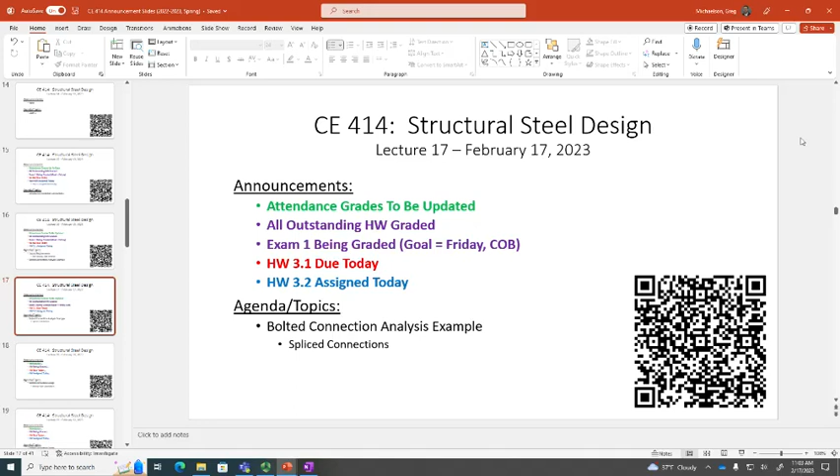Today what we're going to do is continue our discussion of bolted connections. I'm going to try and make it a little more real today, and you'll see what I mean when we start getting into this.

First off, let's just sort of recap the math. I want to make sure everybody understood what we did in class and on the last homework assignment. And my apologies for pulling a sneaky on you about the thread condition, but I didn't tell you what the thread condition was. I made you use your noggin.

If you do not know the thread condition, what do you do? Assume the worst case scenario. And what is the worst case scenario? That the threads are included. You assume the threads are included. The threads being included would be the worst case scenario for bolt shear capacity.

Yes sir, I just wanted to say my favorite thing about this class, or this in general, is there's a lot of fail-safes included. So if you don't know, pick the worst case scenario, and then by the end of it, it might be overbuilt, but that's not a bad thing. It's funny you say that.

There is a philosophy in connection design, which we will talk about later, called designing to develop a full capacity.

So let's fast forward a little and talk about connection design, because here's how it works if you want a nutshell approach. If I tell you to design a connection, the first thing you need to do is determine the factored load, right? So you have your dead load, your live load, 1.2 dead plus 1.6 live, and you get 200 kips.

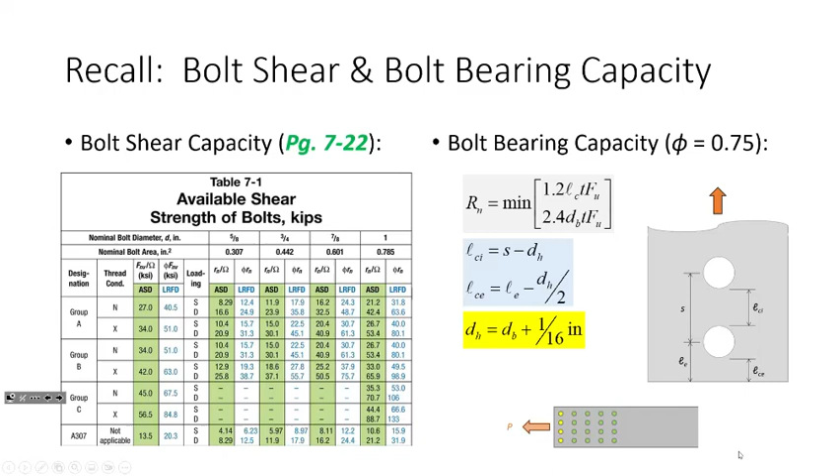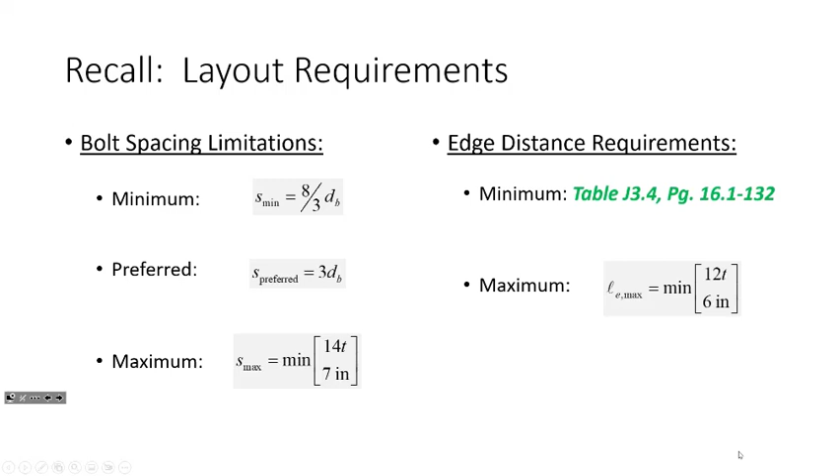Now here's our layout requirements. We have minimums and maximums that we're checking, but if we're designing, maybe we'll use preferred, maybe we'll use minimum. I'll make sure you know on an assignment because I don't want to get 60 different answers that are all right. Everything can be computed except for minimum edge distances, because that just comes from fabricator preference, and that's why it's a lookup.

I like the real world, so I would like to discuss some of the things that we've been talking about and provide some real world context.

Does anybody recognize these pictures that I took? That should be a hint. It's the engineering lab, that building right over here. One of the cool things about this building - my office was in this building when I first became faculty at Marshall a long time ago. I remember walking into the building and saying, ooh, I could see the steel frame, this is awesome. So I took some pictures here because I wanted to work through a real bolted connection, and I picked a connection here in the building, particularly the connections on this beam.

If we look at the structure, we have these round HSS columns that are supporting the gravity load. Between the two is a W shape, a W section beam. These roof joists are framing into the beam, and that beam is connected to the column which goes to the ground.

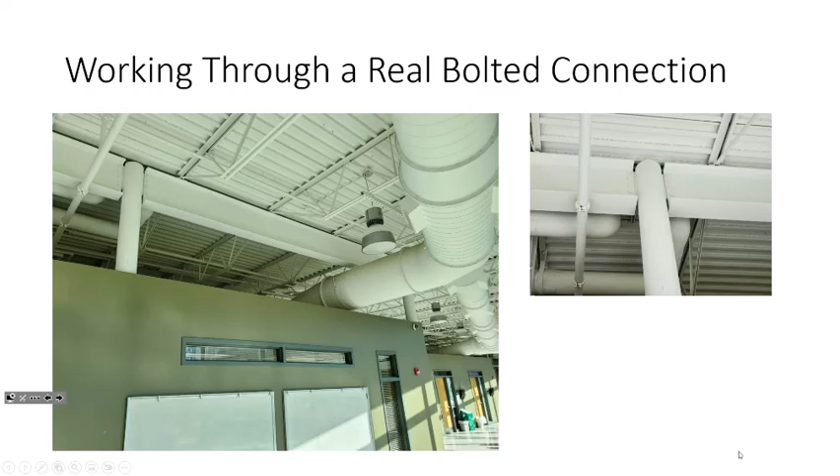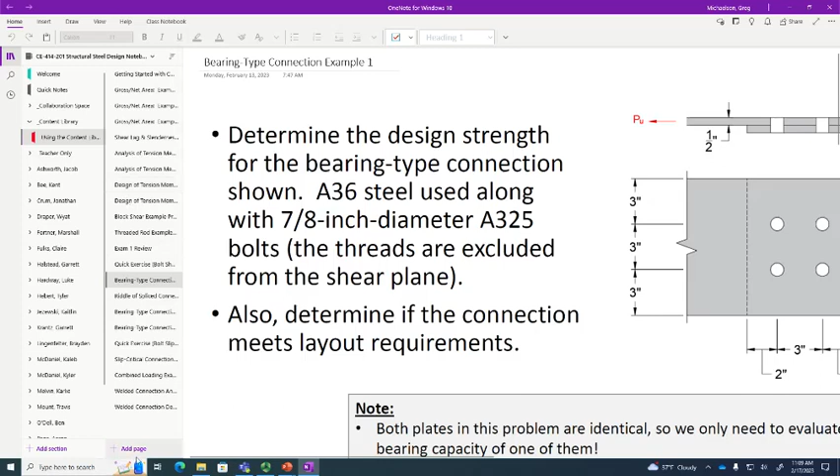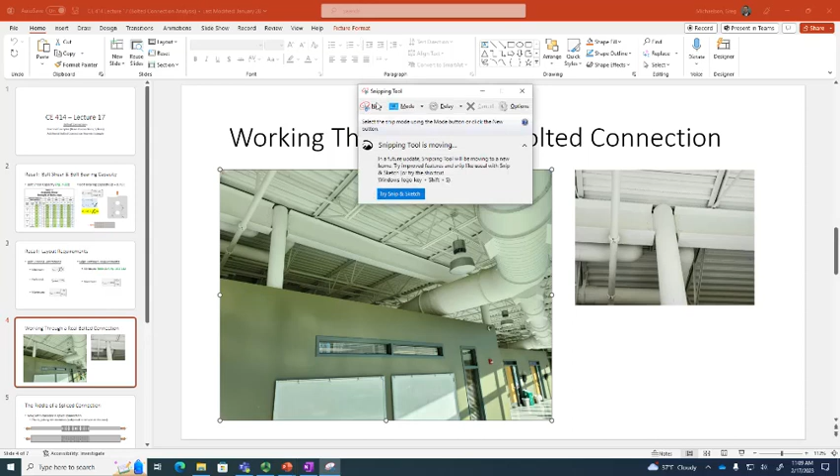So if we go back to what we did last semester in the wonderful world of structural analysis, let's go through this. I'm going to put this right here - real connection discussion. Let's take this picture here, put this here. Let's use the snipping tool. It doesn't like it for some reason. Sometimes the snipping tool, it likes that. For some reason it doesn't like me to snip images, but when I use the snipping tool, it likes it. I don't understand.

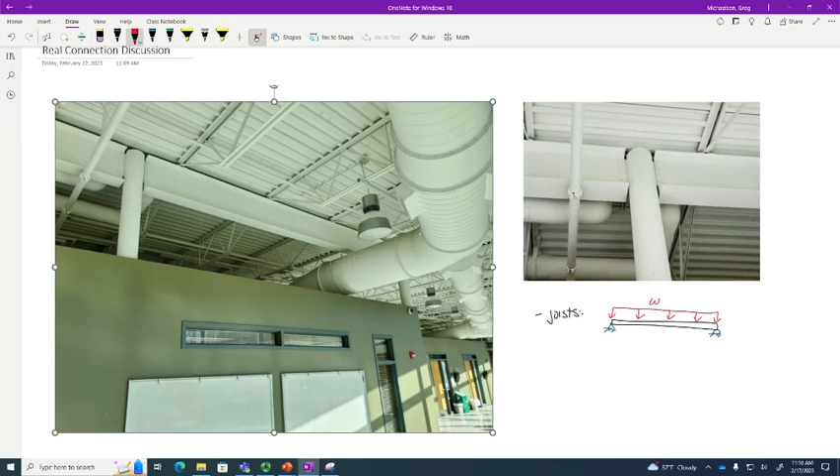So let's go back to the wonderful world of structural analysis. The first thing we would do is treat these roof joists as beams. So the joists would be something like this - we'd have a support condition, and we'd have a distributed load on the roof. By the joists, I'm talking about these open truss looking things - those are called open web joists, basically just roof beams essentially.

So how do I get the load per beam? If I'm looking at this beam, I take half this way and I have the tributary area - y'all remember that from CE 312, wonderful world of structural analysis? What happens is I get reactions, we'll call it RB for the beam reaction. Those are the forces that the beam has to supply to keep the joist upright.

So then if I look at the girder, in this case it's the W shape. So I've got the beam - how many do we have? We've got 1, 2, 3, I think 4 based on the image. So you probably have something like 1, 2 - oh, that's off, that scales off - so 2, 3, 4, right? Okay, now let's see if y'all are paying attention - is that RB? Is this RB?

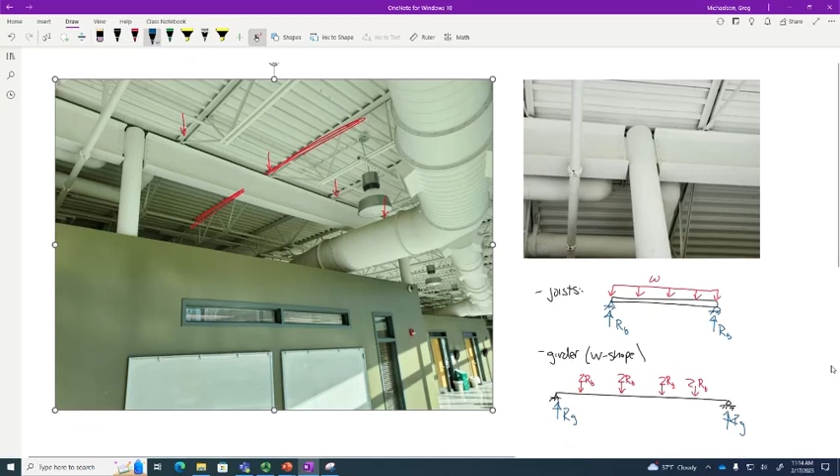Does that make sense? Okay, so now what I want to focus on is the bolted connection. Let's take a look at that. All right, so here's kind of what we've got going on. We'll say bolted connection. All right, let's see.

We've got a round column. So here's our round column. It looks like we've got a little plate sticking out of that. But we've got our I-beam that frames in, and then we've got a plate that sticks out. The plate goes back here, and then we've got something like 1, 2, 3, 4 bolts. Is that right? Does that look kind of right? Everybody with me on that?

Okay, so we're getting, at the end of this connection, this girder reaction. And let's just say, for the sake of discussion, it's 30 kips. It doesn't really matter what it is, but let's just say it's 30 kips. So now we need to start evaluating this. So let's look at this from a bolt shear perspective.

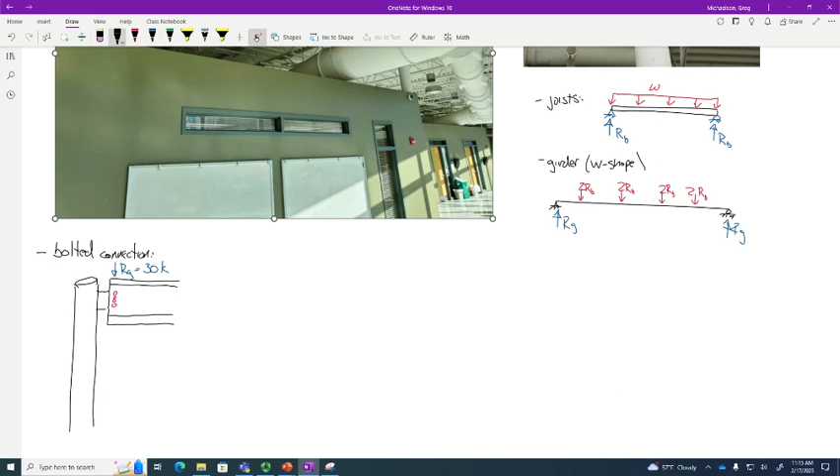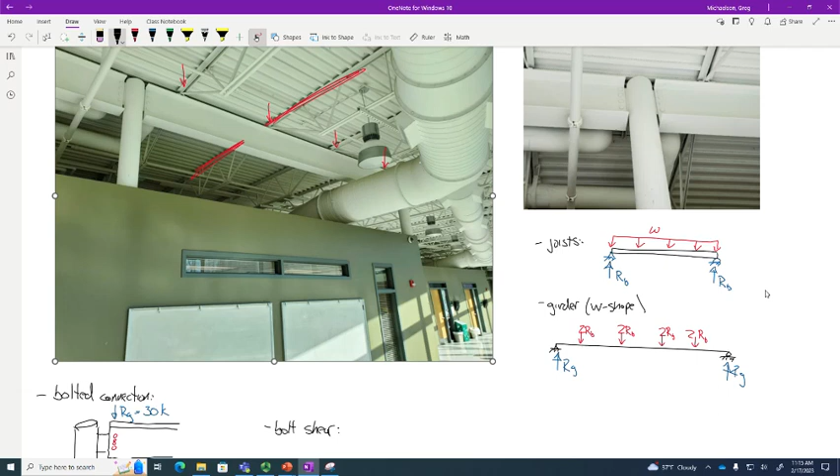Okay, so for bolt shear, let me ask you this. Are these bolts in single shear or are they in double shear? I can zoom in if needed. Is it double? Well, for it to be double, wouldn't there have to be a plate in front and behind? Like if here's the I-beam, the W shape like this, and here's the girder. So is that plate just welded to the round HSS?

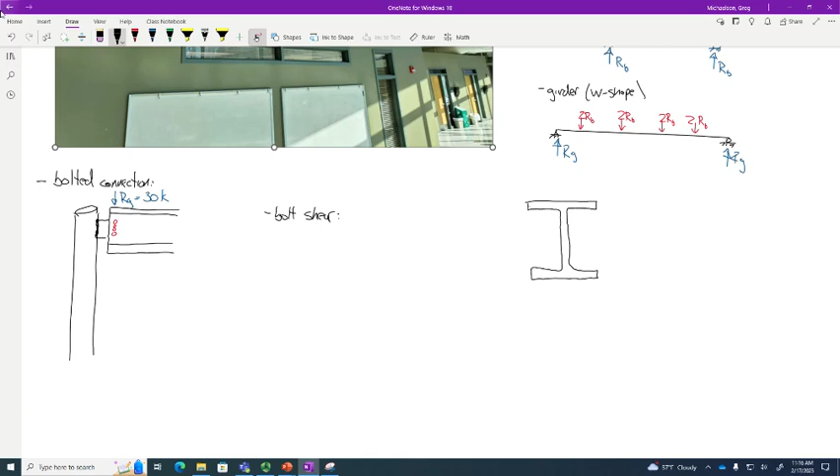Yes, we're gonna get to that in a second, but you are right, there's a weld right here. So then it'd just be single shear. Yeah, there's only one plate, right? Because here's the plate, and the bolts are going through like this. So the bolts are only experiencing that single shear plane. So these bolts are in single shear.

There's 4 of them, right? And so if I told you they were A490 7/8 inch diameter bolts, all you would need to do is look up the capacity, multiply by 4. There you go. Make sense? Okay, now bolt bearing. What about bolt bearing?

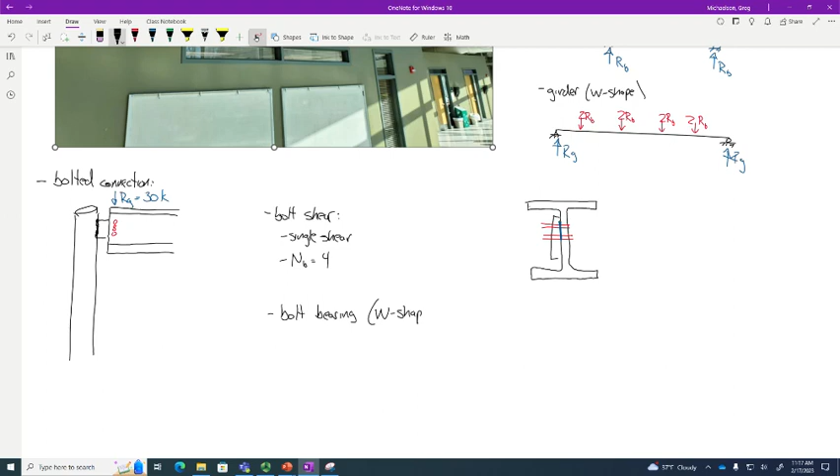Well, for bolt bearing, we have 2 different cases to consider. We have the case for the I-beam and the case for the plate. Let's just take the I-beam as an example, or the W shape. So bolt bearing for the W shape. So if I draw this a little bit more detail oriented...

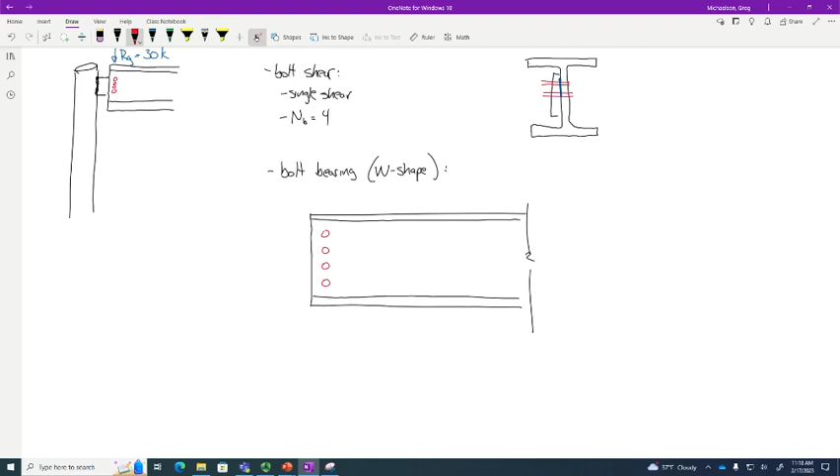Here's 4 bolts, right? Now, if you've got load on top of the beam, which way is this plate going to get mashed up on? It's going to get mashed up right here, isn't it? Because you're standing on the beam and the bolts are keeping it up, so the bolts are pushing this way. So in other words, this is your edge bolt, and these are your interior bolts.

Now, for your interior bolts, the capacity is the minimum of 1.2 Lc t Fu and 2.4 db t Fu. And in this case, I propose that Lc is that distance, the clear distance from edge of bolt to edge of bolt. In other words, this is how much material we'd have to tear through to fail the connection in bolt bearing. Does that make sense?

Now, let me ask you this. Do you think that bolt right here is going to rip through this web and all of that flange up top? You really think that's going to happen? I don't, right? So probably what I would do for this edge bolt is just take the capacity as 2.4 db t Fu, based on the connection schematic. So here's the capacity of the edge bolt, here's the capacity of the interior bolt under bolt bearing: 1 edge bolt, 3 interior bolts. There you go. Does that make sense?

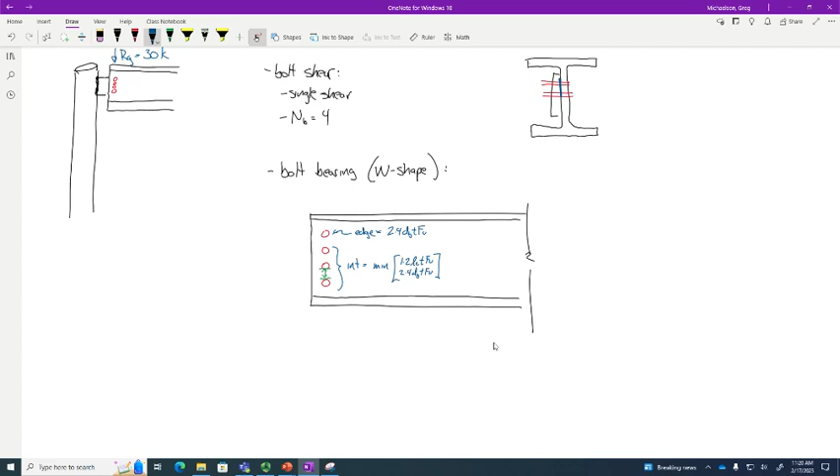Okay, now what I want to do is focus on the riddle of a spliced connection. A spliced connection is a little different than the connections we've been looking at so far, which have really just meant to connect element A to a plate, or element B to the next adjacent element.

Instead, what we're doing here for a splice is essentially what happens when we have an element in a structure.

Oh my goodness, every time. Who is this? Oh, they're just going to have to wait. Sorry. I'll just say in class, this is what happens. Take a little commercial break. All right, break.

So in the case of a spliced connection, this happens all the time in structural elements that are very long. It happens in bridge land. Let's just take the Nitro St. Albans Bridge as an example. How many of you were on that site when we did the site tour? Those beams were long, weren't they? It's not like it's the longest single plate girder span in the United States or anything, but it's a little long, right?

I don't know, how many of you have ever driven in West Virginia before? Roads kind of do this, don't they? It's not like driving in Iowa. So let me ask you a question: how easy is it to transport a 562-foot long beam down the roads of West Virginia? Give them a point, right? We don't do that.

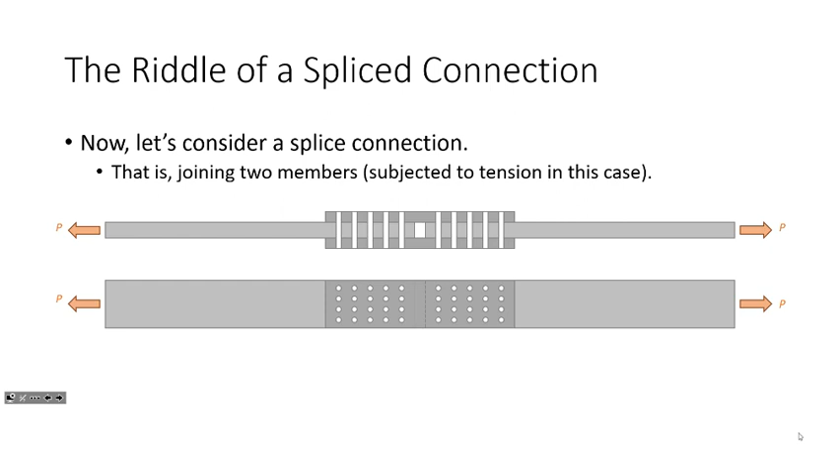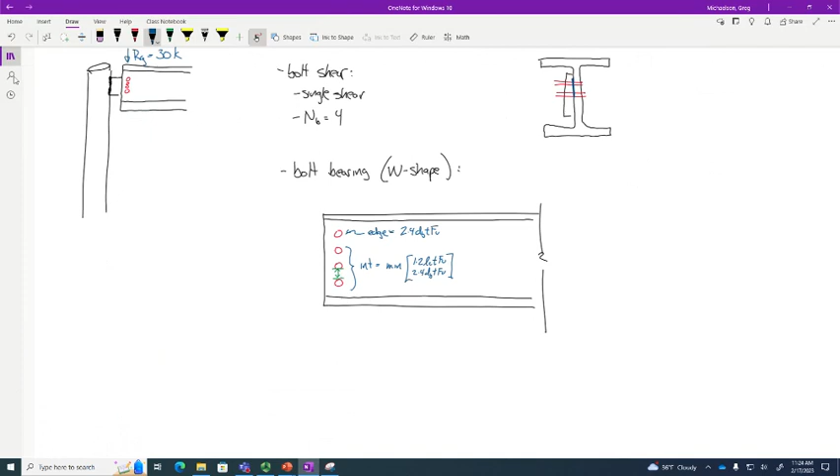So far, so good? Now I want to go through the riddle of a splice connection. In other words, how do we actually assess its capacity? Because there's some thought that needs to go into this just to make sure that you're handling this appropriately. So I have here that same splice connection.

I want to make a very important point about the analysis. Unlike the connections that we've looked at up until now, all of the bolts are acting to transfer load in the same direction. We have a member connected to a plate or to another element and we yank on it. All of the bolts are resisting the load the same way. That's not happening in a splice.

In a splice, we have a member and we're joining it and we're yanking on it. Half of those bolts are acting to transmit load to one member, and half are acting to transmit load to the other member. Really, when you look at a splice, instead of looking at this member as a whole, you should be recognizing the presence of symmetry - like taking a samurai sword or lightsaber through the member.

So really what we're dealing with is something like this. We have a plate - let me make this a little bigger, I want this to be really salient - transmitting load this way. And then we have two cover plates, or splice plates, on top of that, transmitting load this way.

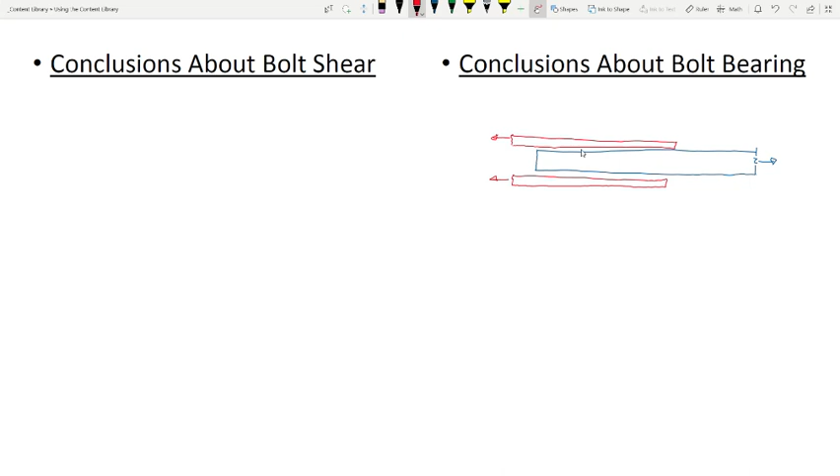If I go off of my diagram here, I have bolts 1, 2, 3, 4, and 5. Let's do that. And just to make this a little easier to digest, I'll fill these in. So these are the bolts from the side view.

Now, just to clarify what we've got going on here, let's put some dimensions on this. I'm going to call this TM for the main plate, the main member. And we'll call this TS1, and let's call this TS2. So this is the thickness of the main plate, and these are the thicknesses of the splice plates. Make sense so far? Okay.

Now I want to make some conclusions about bolt shear and bolt bearing. Let's start off with bolt shear. Can somebody tell me a conclusion about looking at these bolts, just by eyeballing them, something we're going to need to consider when we look up the capacity per bolt in 7.1? Let's assume they're A325, 3/4 inch diameter bolts. When you see these bolts, what's the first thing that pops in your head?

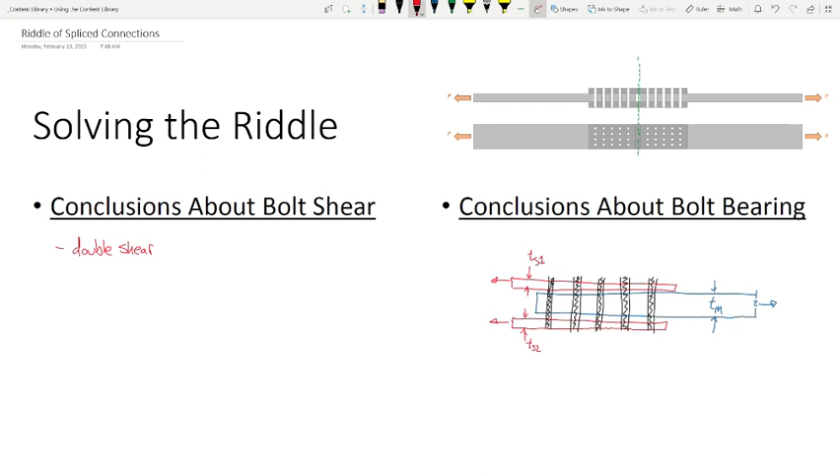The second thing I want you to think about is that we're only considering half of the bolts for connection capacity. In other words, if I look at the connection as a whole, how many bolts are in this splice? Well, 1 through 40 - there are a total of 40 bolts in the splice, but only half of them are transmitting load one way, and the other half are transmitting load the other way. So in terms of connection effectiveness, only 20 bolts are considered effective for the connection capacity.

And if you're like, wait a minute, that doesn't make sense - there's 40 bolts, how are you only counting 20? Well, let me ask it to you like this.

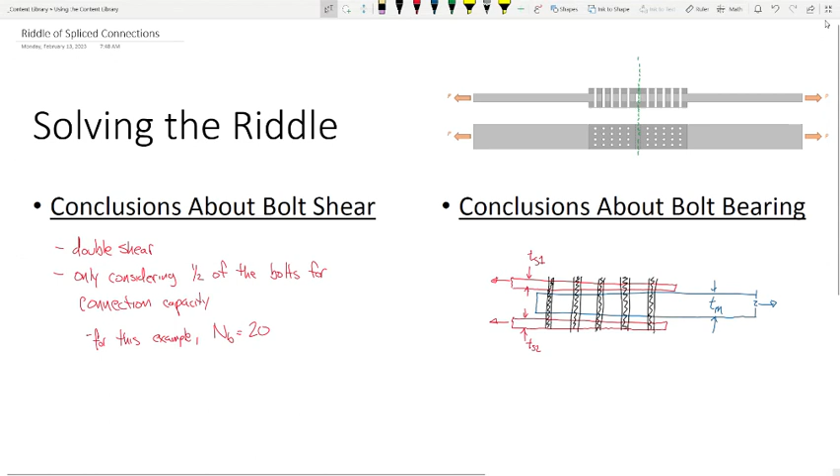Here's the connection. Let's look at the connection. How many bolts would I have to shear in half or delete from this connection for it to no longer be effective in resisting load at all?

I posit to you the answer to that question is 20. Because if I were to take this splice connection and just delete all the bolts over here, is it doing anything? No, it's just a member and it's not connected at all. So that's the amount of bolts I would need to delete for the connection to not be effective. So if I'm trying to ask what is the capacity of this connection, I don't account for 40, I only account for 20. Does that make sense?

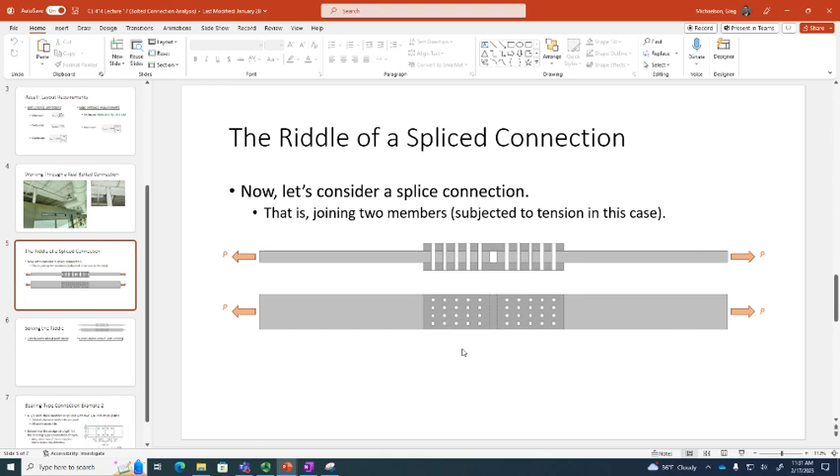That's usually something that's kind of hard to understand when you first start looking at splices. Like, why are you only considering half the bolts? Well, that's why. With me so far? Okay.

Before we start making conclusions about bolt bearing, I want to go back to the formula for bolt bearing. The formula states that Rn is the minimum of 1.2 L C T F U and 2.4 d B T F U. For this expression, we know that the hole diameter is the bolt diameter plus 1/16 of an inch, and LCE is LE minus DH over 2, and LCI is S minus DH.

Is everybody okay with that? So here's what I want to isolate real quick. I would argue that if you want to compute bolt bearing capacity, there are 4 variables that matter. Well, actually 5, but I'm gonna make a point about that. So the 5th variable is the bolt diameter.

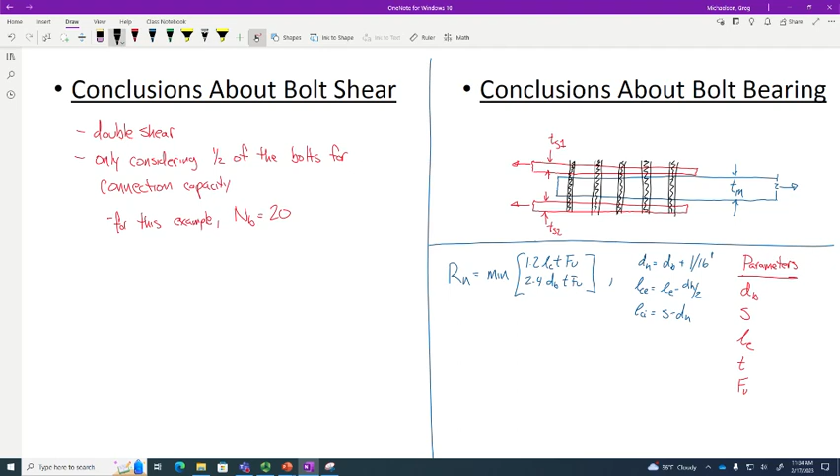Let's look at this. One of the reasons I said there are 5 parameters, but that bolt diameter one doesn't matter - why doesn't it matter? Well, if you're trying to compare capacity, the bolt diameter is the same for both the main plate and the splice plate. So we don't really need to worry about that.

But each plate may have a different FU. Each plate might have a different thickness. So let's talk about thickness. I propose that the thickness of the main plate is just going to be Tm. What about the thickness for the splice plate? I propose let's just add it up and use that value as the thickness in computing the capacity.

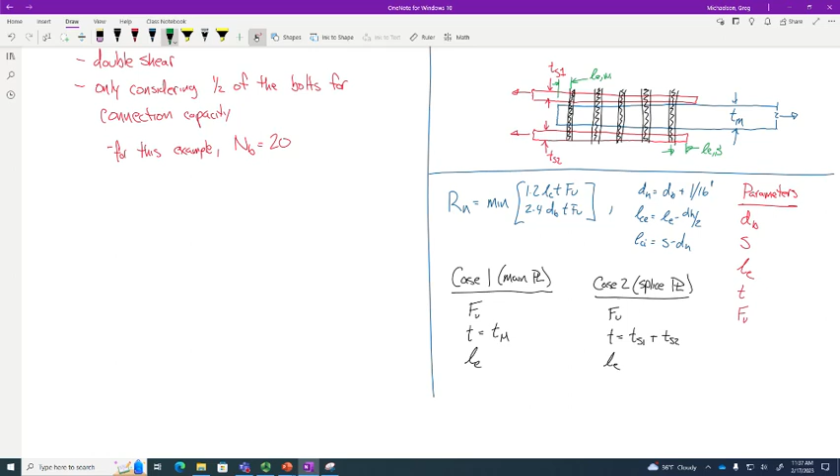The reason why all that's important is because when we start talking about this example, I don't think I'm going to do the entire example. Instead, I kind of want to just guide you through some of the decisions that you need to make in order to be able to do the example. The rest is very plug and chug grunt work, okay?

So what I'm going to do is take this example and walk through the bolt shear, walk through the bolt bearing, but instead of doing all of it, I'll probably do some of it and just say, okay, if you do it right, here's the answer, and let you sort of do that on your own because, again, this math is very mechanical. It's very rote, so you'll see what I mean.

Okay, so we have here a 1/2 inch thick member that is spliced with two 1/4 inch thick plates. This is a 1/2 inch, these two are a 1/4 inch. We have 7/8 inch diameter bolts. All the steel is grade A36. So we're going to determine the design strength for the connection shown and determine if the connection meets layout requirements.

Now, one thing we're not going to do together is check whether or not the connection meets layout requirements because I really think that's easy, right? Just check the minimum and maximum bolt spacing, check the minimum and maximum edge distance, see if these dimensions fall in between. That's not hard, right? For checking minimum and maximum bolt spacing, let's use our noggins here.

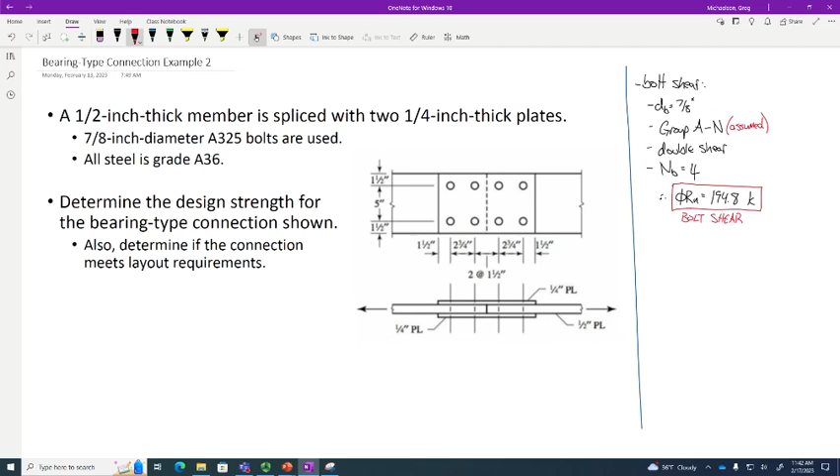Now, for bolt bearing, okay, and I'm going to try and summarize this in a way that makes sense. Okay.

So first off, we know that the bolt diameter is 7/8 of an inch. So therefore, the hole diameter is that plus a 16th, not an eighth, and so we get 15/16. Okay?

Now, in order to think this through, let's just recognize again that's sort of our governing expression. These are our starting equations that you might find on a formula sheet.

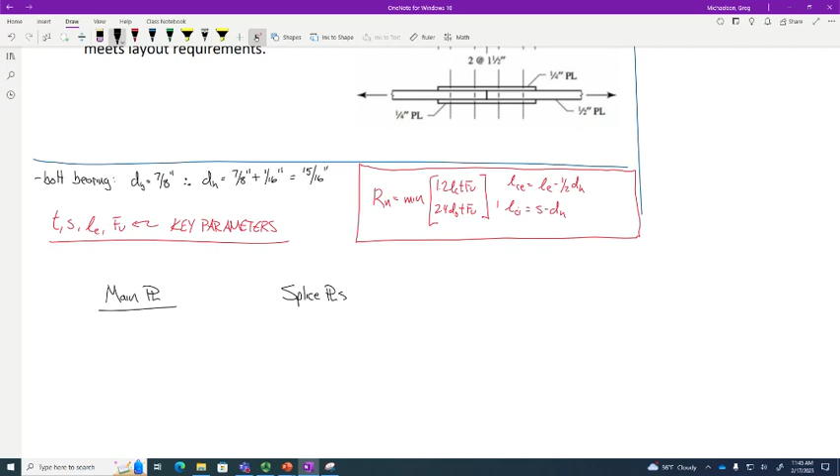So let's look at the main plate, and let's look at the splice plates. Let's start off with the FU. What is the FU for the main plate?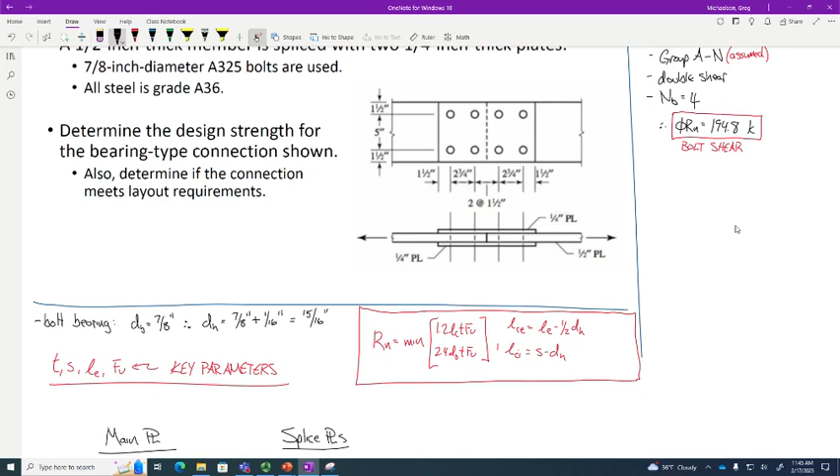What were we told about steel? What grade? A36. But what did it say? It didn't say just A36. What's the whole sentence say? All steel is grade A36. So for this problem, for both the main plate and the splice plates, FU is 58 KSI.

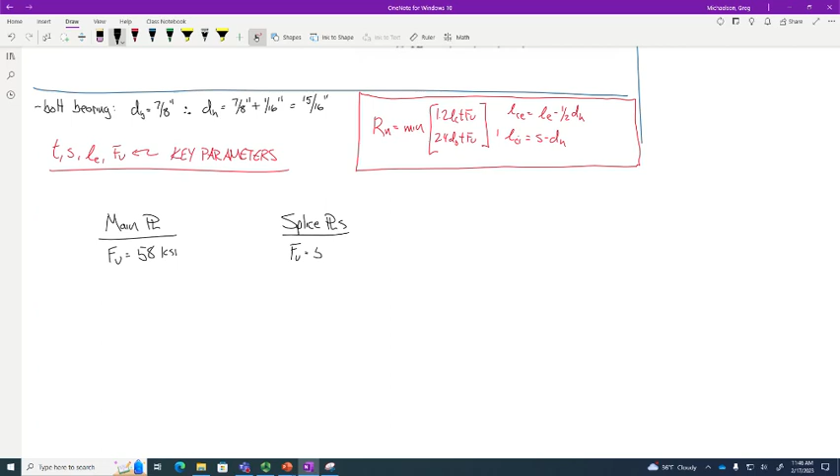Now let's make sure we're paying attention here. What is the bolt spacing? Which bolt spacing value do we use? Do we use 5 inches or do we use 2 3/4?

Well, which way are we yanking on the bolts? We're yanking this way, right? So when we use these bolt spacing and edge distance values, we're talking about the ways that the bolts will tear through the plate. So which way are they going to tear through the plate? Are they going to tear through up and down or left and right? So the 2 3/4.

Exactly, the 2 3/4. That's the one that you use, right? But is that the same for both the main and the splice? Yes, it's the same, right? So S.

All right, what about LE? Is LE the same? This connection does not have a gap, by the way. So what is the distance, if we're talking about the main plate, LE is this distance, right? What is this distance? 1.5 inches, right?

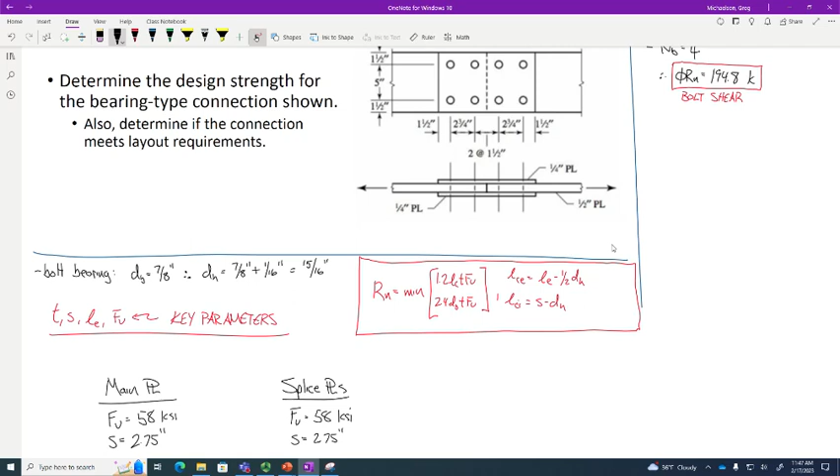What about for the splice plates? We're talking about that distance. What is that distance? 1.5 inches, right? Does everybody see that? So LE.

And finally, what about the thickness? What is the thickness of the main plate? 1/2 inch. What is the thickness that we're going to use for the splice plates? 1/2 inch, because there's 2 of them, right? 2 of them are 1/4 inch. So this is 1/2 inch, this is 2 times 1/4 inch.

So what can I tell you about bolt bearing? There are 2 cases of bolt bearing, but for this problem, what can I say? They're going to have the same capacity, so just do one of them, right? So we say compute LCE and LCI, okay? I'm going to tell you what they are.

That's what they end up being, 0.594 and 0.938.

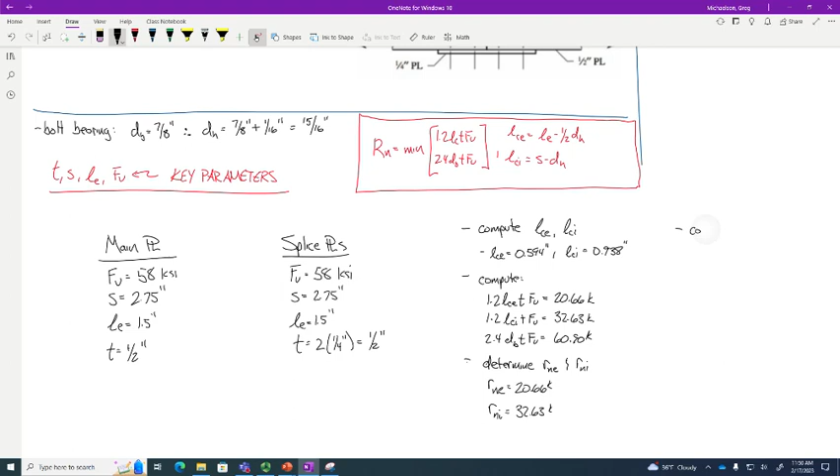Then we determine or compute RN. For either of these, how many edge bolts do we have? How many interior bolts do we have? 2 and 2, 2 and 2. So RN...

So when you chunk that out, you get 106.58 kips, and finally compute phi RN, and phi RN is 79.93. And I'll tell you, that's the answer.

Because it does, right? Because the bolt shear capacity was a lot more. They were in double shear, pretty hefty bolts, so.

So yeah, does that make sense? Okay, now I'm gonna tell you something.

You've got a connection homework. The two bolt bearing cases are not gonna be identical. So what's gonna have to happen is you're gonna have to do the math for case one and then do it for case two. But it's repetitive, right? It's just the same thing over and over again. It really shouldn't take that long. And you'll see like one of them's thicker, but one of them has a higher grade of steel. The only way you're gonna assess it is just to be able to check both.

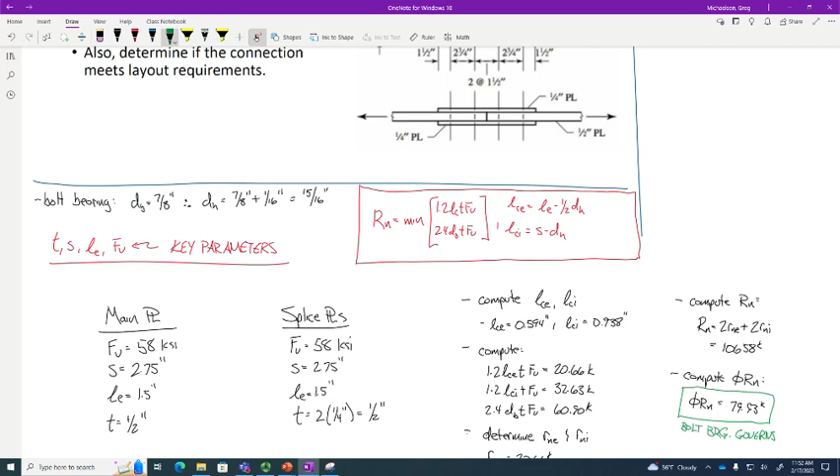I will leave this up here if you want. Can we leave this up here for a sec? All right, let me stop my recording and then I'll hold it over in case I need it.